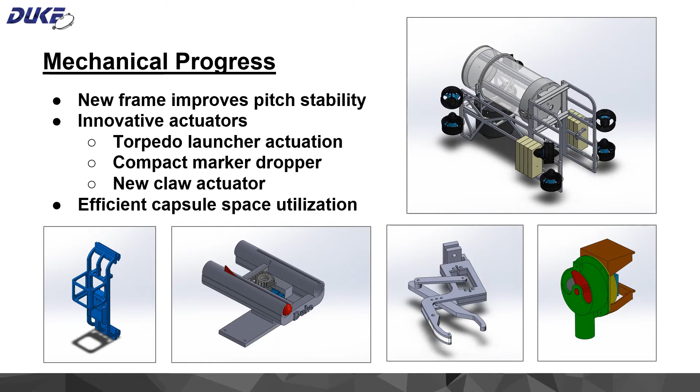The mechanical team has been busy this year upgrading Cthulhu to Cthulhu 2.0 by improving the frame design to promote passive pitch stability, innovating on all of our actuators, the torpedo launcher, the marker dropper, and the grabber claw, and making more efficient use of the cylindrical space inside the electronics capsule by creating new electronics mounts.

One of the major issues with the original Cthulhu was that it pitched forward about 45 degrees when the thrusters were off. We fixed this issue in Cthulhu 2 by creating an entirely new side frame piece that's several inches longer. This enabled us to move the DVL backwards in the design, thus moving back the center of mass of the robot, and we shifted forward the center of volume by incorporating these foam mounts.

The foam mounts are also highly adjustable, not only in the positioning of the foam, but also in the number of foam blocks, so that we can accommodate any number and any mass or volume of actuators that we might add to this front area. On Cthulhu 2.0, we also added about an inch to the front mounting area and included only horizontal bars in the design to facilitate mounting.

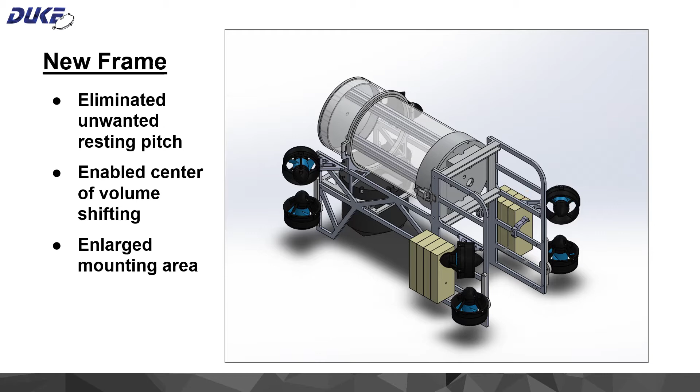The mechanical team also made an effort this year to better utilize the space inside of our electronics capsule. You'll notice that the mounts shown here excellently utilize the semicircular profile of half a cylinder. There's also space included behind this mount and some others to enable Ethernet and USB cables to be routed between the two halves of the stack.

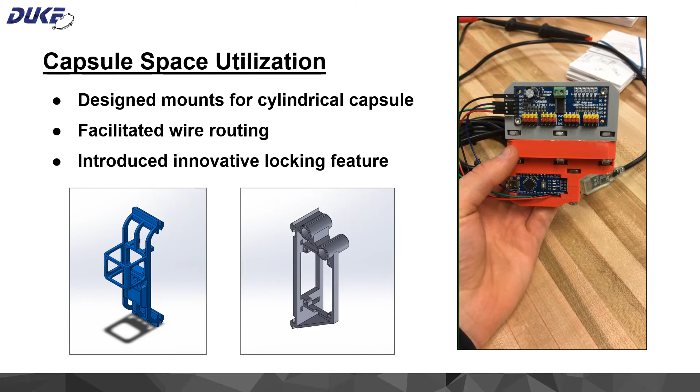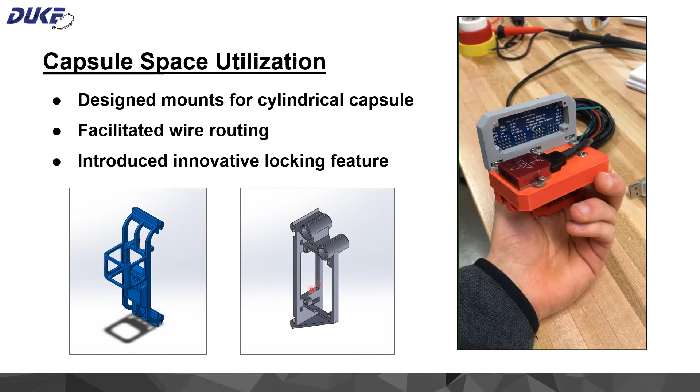An innovative locking feature was also introduced in our IMU mount, which is also connected to the multiplexer and Arduino Nano mounts. Notice this screw head here that's just flush with the surface of the plastic. There's another screw head that's adjustable underneath the IMU. Those screws protrude through to the other underside of the mount. The nubs of the end of the screw are just barely protruding here.

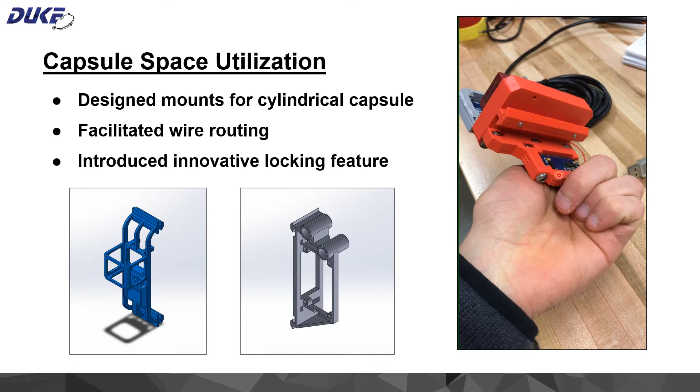When this is slid in place in the aluminum member that it goes into, those screws can be tightened to fix the entire assembly very firmly in place, so that motion of the IMU relative to the rest of the robot is not a problem for us.

The grabber is positioned like this. It is controlled by a servo, which goes in here. It is made with 2 water jet aluminum plates with 3D printed spacers to allow this inner jaw to move. There are 3 settings for the jaw to determine the range of motion. This jaw shape was designed so that it would be able to grab multiple different sizes of PVC pipe.

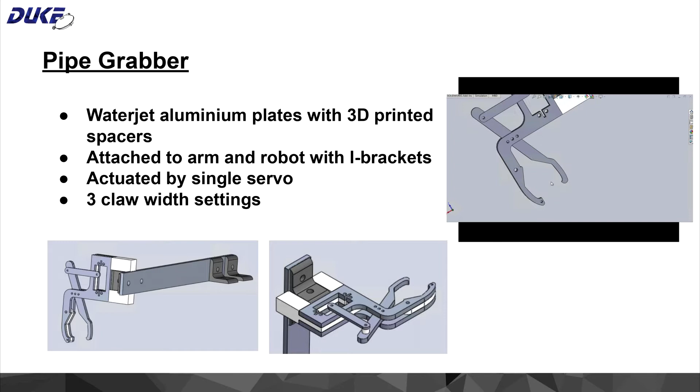The marker dropper mechanism is reloaded through a U-shaped hole that allows markers to be placed inside and inspected before competition. The hole is then covered with a plate that's secured using a screw.

This design ensures that the marker dropper is both easy to load and secure once sealed and installed onto the robot. The entire marker dropper mechanism is mounted next to the downwards facing camera, which reduces parallax error.

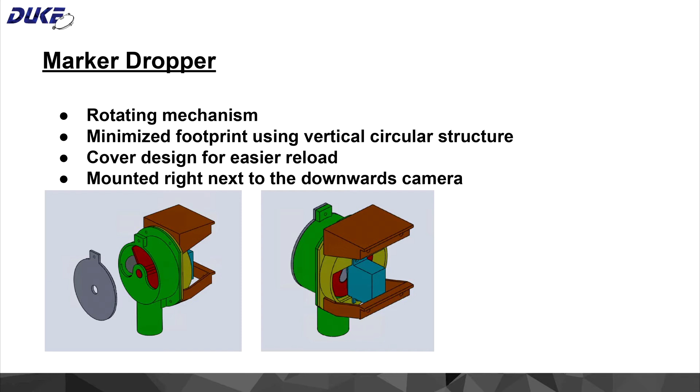Our new marker dropper has a rotating mechanism to release metal balls, which allows it to load multiple markers. Controlled by a single servo, the cross-shaped part in the middle rotates to push preloaded markers to the output tube one at a time. Using a vertical circular structure minimized the footprint of the assembly, allowing for easier mounting. A long output tube in the bottom improved the accuracy.

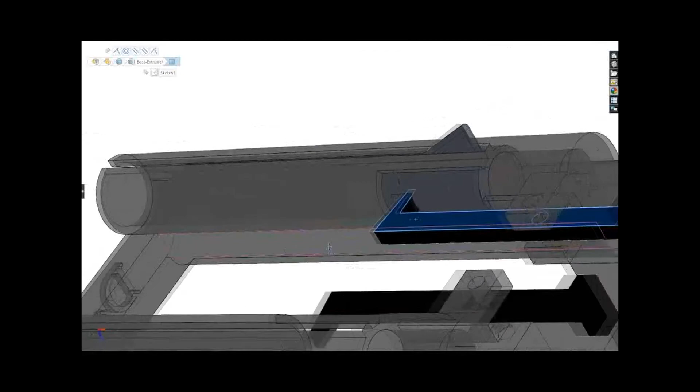This year, we also updated and refined our torpedo mechanism from its original design last year. With our previous design, our launcher used two curved arms to keep the torpedo in place before launch, which were quite fragile and prone to breaking. Due to the shape of the arms, they would also occasionally either jam or release early, causing the torpedo to

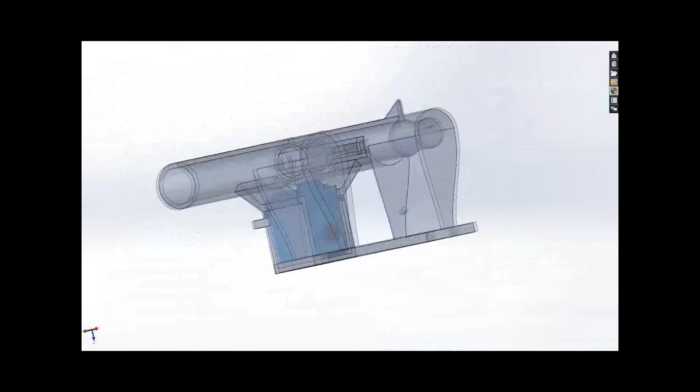misfire at undesirable times. To fix the issue, we adopted a new mechanism that, rather than relying on circular rotation like the previous design, used a simple linear mechanism, thereby reducing the chances of misfire due to inconvenient angling of the arms. We also refined the design in a more general way by adding various improvements such as eliminating overhangs and excess material to hasten the printing speed and therefore the prototyping and design process.

The electronics team is responsible for design, construction, and testing of the electronics stack, which houses all of our electrical devices and components that have functions such as power distribution and signal processing. We also maintain our computer system, write code to interface with sensors, and in general write any code that is not hardware agnostic. We've had a great deal of progress this past year, ranging from upgrading our computer to developing new custom boards and acoustics algorithms.

We upgraded our computer this year to a brand new Jetson TX2. The powerful onboard GPU provides enough computing power to use our new computer vision algorithms. Due to the Jetson using an ARM processor, a more power and space efficient processor than our previous x86 processors, we were able to solve issues from thermal management, with us only needing to use a passive heatsink.

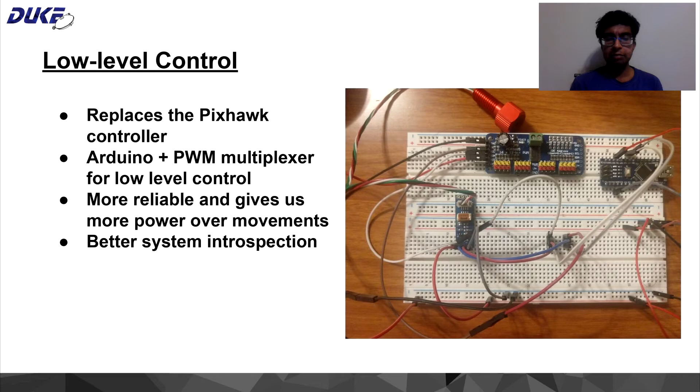We have also replaced our main hardware controller for the robot. We used to have the commonly used PixHawk for our controller and used MAVLink to communicate with our ground control station during tethered runs. Unfortunately, this connection would oftentimes drop, causing many delays during testing. By switching over to an Arduino and multiplexer for low-level controls and having ROS establish communication, we found that this provided us with a more reliable connection.

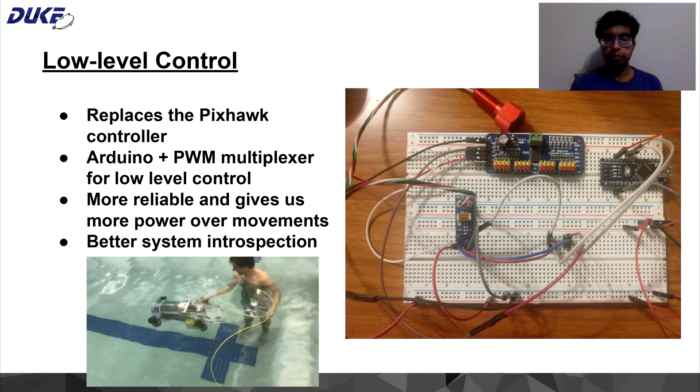We're also able to do more complex maneuvers now, such as rolls, and are able to get more information about the thrusters' output, allowing us to more easily debug and identify problems when they arise.

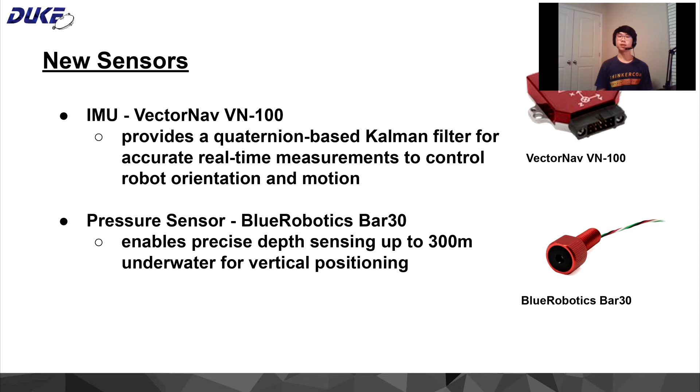For new sensors, the VectorNav VN100 replaces the currently used PixHawk. The VectorNav IMU, which uses a quaternion-based Kalman filter, provides much more accurate data than the PixHawk. This data is then published to a ROS node and processed by the robot. The Blue Robotics Bar30 is also added, allowing the robot to detect its exact Z position in the water.

For other physical devices, new PCBs will also be added to the robot. The ESC PCB will allow a single voltage rail to power all of the robot's ESCs. The Acoustics PCB puts all of the robot's acoustics filters together in a single location.

Finding the location of the acoustic pinger is important due to the number of points offered. Because of the low signal-to-noise ratio, we developed two systems for this task. The first system uses phase difference and time difference of arrival, or TDOA, to precisely localize the pinger.

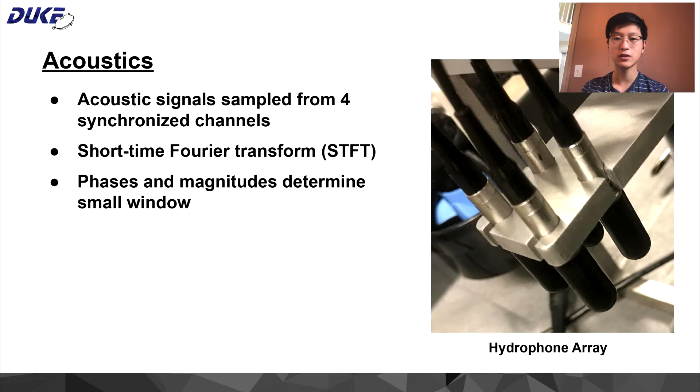Acoustic signals are sampled from a hydrophone array, and short-time Fourier transforms are applied to generate a list of phases and magnitudes. Based on these magnitudes and phases, a small window is determined. After averaging the phases in the window, the phase differences between the hydrophone channels are calculated and used in TDOA.

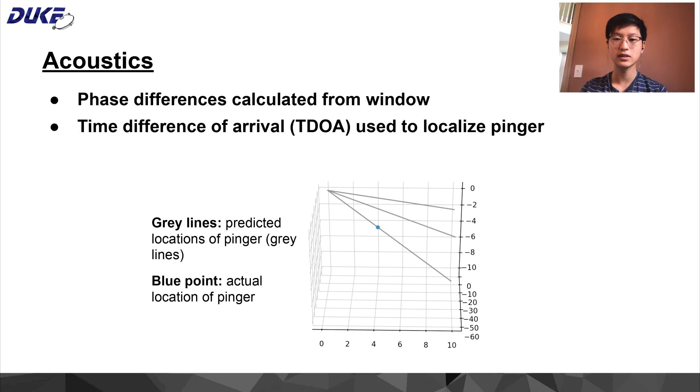Although accurate, this system is susceptible to noise. A second system that is more robust but less accurate was designed to estimate the location of the pinger and provided an initial guess to solve the nonlinear equations of TDOA.

In this second system, a separate hydrophone array with a large distance between each hydrophone is used to find time difference rather than phase difference. This is done by first filtering with a Butterworth bandpass filter, then cross-correlating between channels. Using the time differences, the estimated octant in which the pinger is located is determined. This system was successfully tested on simulated data generated in MATLAB.

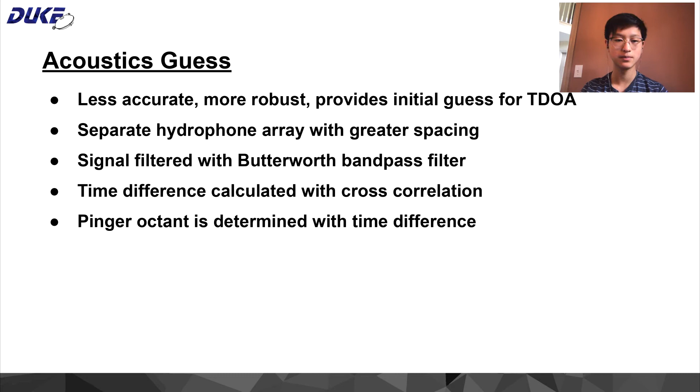In terms of our strategy for software, we springboarded off our transition to ROS and Docker to continue with our themes of extensibility and modularity by building standalone code packages that allow for parallel development. Also, having in-house code means that we have more customizability, such as our machine learning for computer vision.

Keeping all this together is a lot of frequent communication between subteams and also lots of testing in the pool starting in early autumn. But now that we've had to move virtual, we've actually started using our in-house physics simulation to do lots of virtual testing remotely.

We chose to remove the PixHawk flight controller that we used last year because it limited our ability to customize our controls algorithm and thruster placements. So we designed our own controls package, which determines the power to send to each thruster. It uses the ROS PID package and was designed to be completely robot agnostic. This means that it works for any possible number or configuration of thrusters, so we don't have to redesign it for future robots.

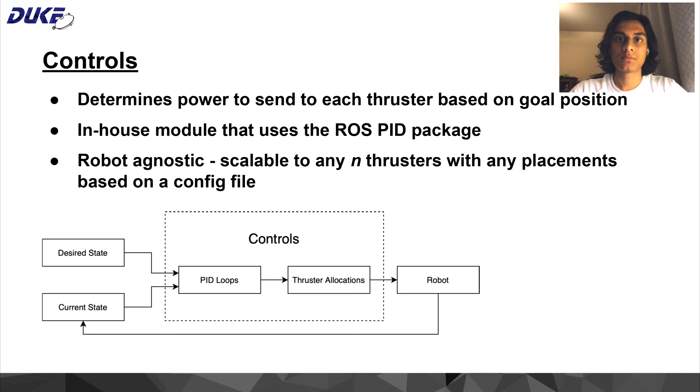With more advanced control, vision, and overall capabilities for competition, we designed a task planner for our 2020 competition entry to easily and intuitively control our robot's autonomous progression of tasks at a higher, more abstracted level. The task planner listens to data from vision and sensor fusion and publishes instructions for controls and actuators.

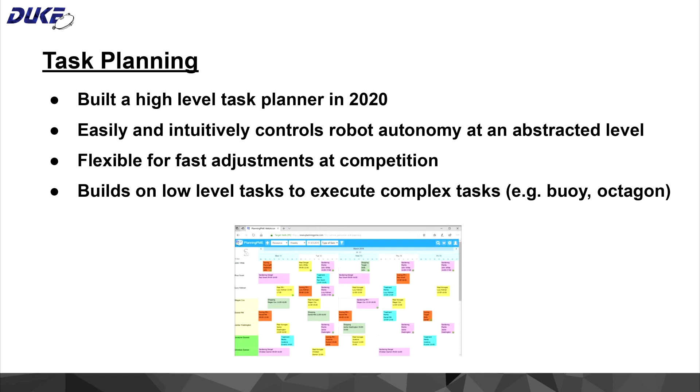The concept of our design is to build on top of straightforward tasks, such as movement, to build more complex sequences for the robot to follow, such as leader-follower, and ultimately the tasks required for competition: the gate, the buoys, the octagon, etc. Our task planner is designed such that we can quickly and easily begin our robot's autonomous navigation through the competition course while being able to make flexible adjustments at competition with ease.

To create a realistic underwater simulation, we used CoppeliaSim, which is a physics simulator that allows us to load in a model of our robot and apply forces, such as drag and buoyancy forces. The simulation is able to receive thruster power values and to send mock IMU data through ROS to imitate the actual robot, allowing for testing with the rest of the software stack, particularly controls and task planning.

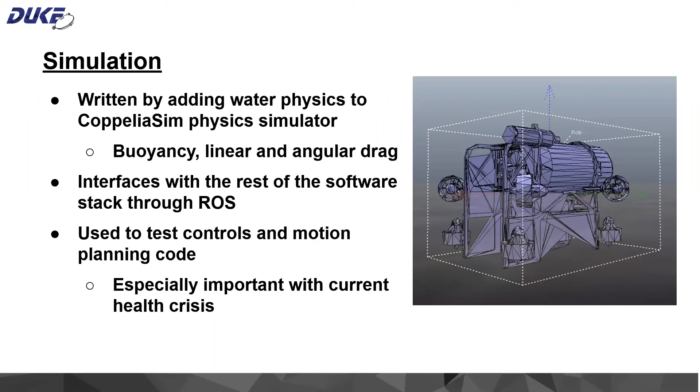Additionally, we calculate bounding boxes on objects within the robot's frame of view, allowing us to mimic computer vision for further integration with the rest of the codebase. When the pandemic forced Duke to close campus, the simulation became especially important to how the CS team tested. Here, the robot is moving through the starting gate and resurfacing after. The view in the upper right-hand corner shows the perspective of the camera on the front of the robot.

For computer vision this year, we decided to completely revamp our old conventional techniques and move on to machine learning, and we're super excited to show you the scalable models that we've built. To implement machine learning, we used a Faster R-CNN network with ResNet 50 as a base.

The pipeline goes like this. You get in an image, and then we extract the features of the image using a ResNet 50, and then we propose bounding boxes for where the stuff might be, and finally, we use the base ResNet 50 model to classify what's in those boxes and therefore determine what's there. We started with the pre-trained model, and then we applied transfer learning to our network using the competition footage that we gathered last year.

With the footage that we had from previous competitions, we first manually labeled them and then developed a pipeline to basically read in these images, apply data augmentation such as random horizontal flip and saturation, and ultimately train these. And with that, we were able to train pretty strong models for gate detection and buoy detection, and we now also have the flexibility to do so for future tasks.

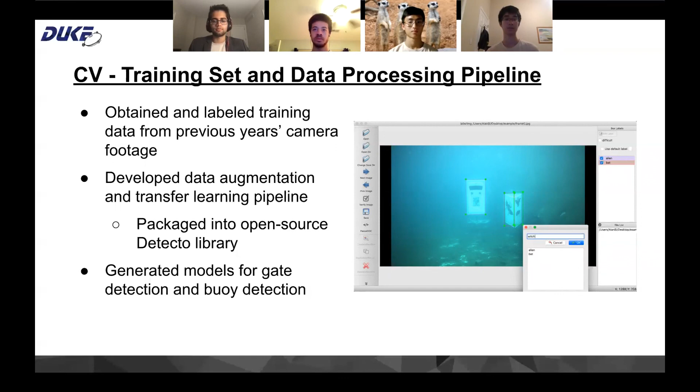In order to test these models, we built a ROS publisher that simulates stereo footage, and we achieved a 95% classification accuracy, as well as a high IOU. And as such, we are confident that our model would scale well for any image classification tasks.